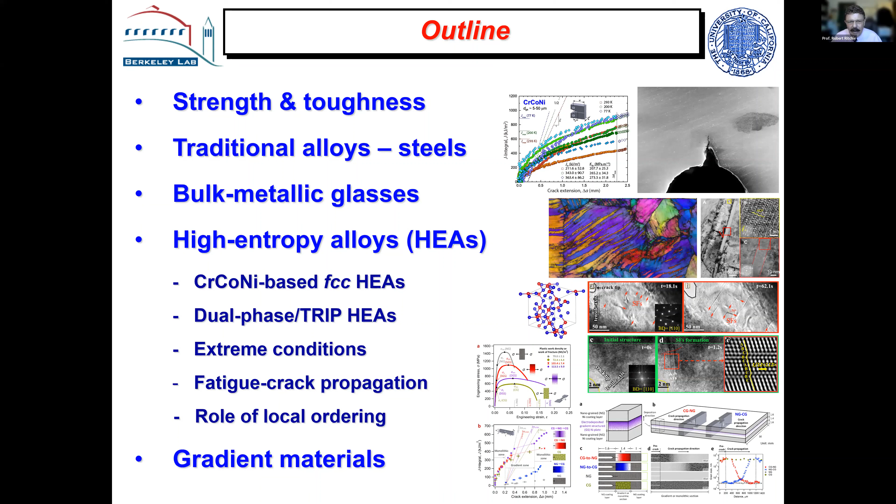And at the end, if there's time, I'll talk a little bit about gradient materials, which is nature's way of doing it. So let's start with my notions of strength and toughness. I call these conflicts because in many cases, high strength materials have low toughness and vice versa.

But I think you can look at toughness—it's obviously perceived to be the energy preventing a crack from causing fracture. But I look at it as a competition, and it's a competition between two classes of toughening mechanisms.

The classic ones, which are primarily used in ductile materials, I call intrinsic toughening mechanisms. They take place ahead of a crack tip, and they are basically mechanisms that inhibit damage. The primary driver for this is plasticity.

And that's why there's a conflict between strength and toughness, because high strength materials have less plasticity, and therefore there's less plasticity to engage in this intrinsic toughening. These mechanisms occur ahead of the crack tip, and they primarily originate at the nanoscale, the scale of a Burgers vector or something like that.

If you look at a brittle material, though, those mechanisms don't work, because a brittle material in the limit is defined as one where you break a bond at the crack tip rather than emit a dislocation. And there you have to operate what I call extrinsic mechanisms.

These operate primarily behind the crack tip or at the crack tip. They are associated not necessarily with plasticity, although plasticity could play a role—they're associated with shielding. They are mechanisms that basically shield the crack tip from the applied stresses, and they carry load that would otherwise be used to propagate the crack.

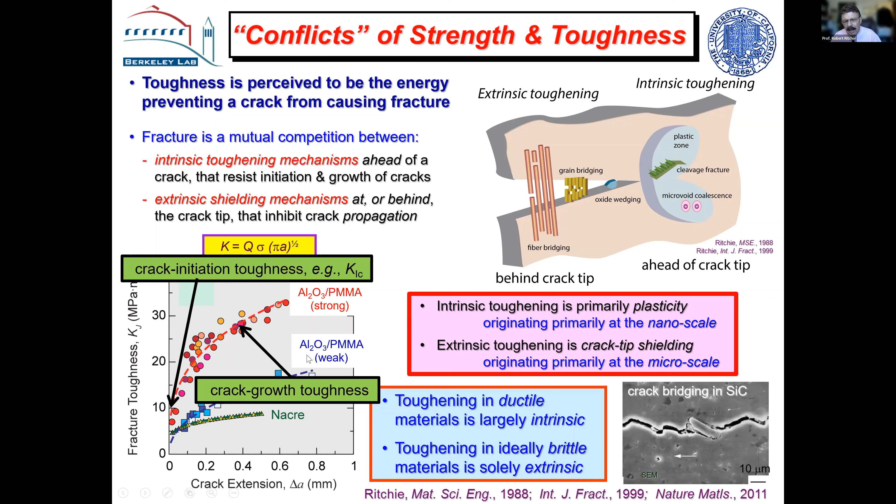Okay, so let's start with something a little bit old. I want to talk about steels, basically traditional alloys initially. And just to remind, before I get into this, there was a phenomenon that we looked at 20, 25 years ago, which we call delamination toughening, which has relevance to these steels now.

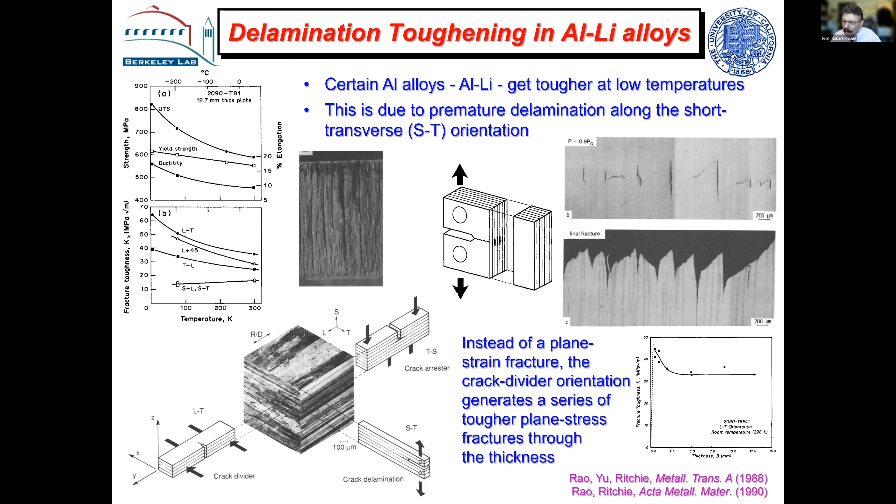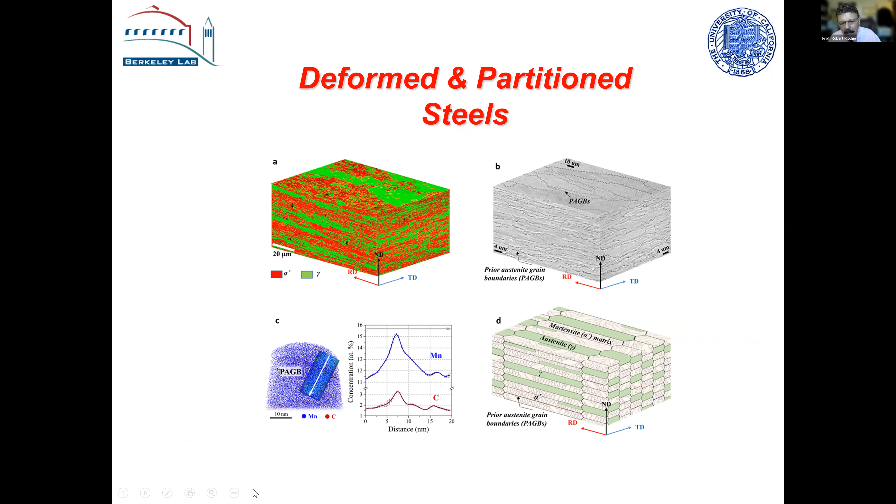Well, when we look at these new materials, for steels, a similar thing happened. These are called deformed and partitioned steels, developed by Mingxi Huang at the University of Hong Kong. His philosophy was to make a very cheap steel with great properties. And this is cheap—it's got just manganese in it, a little bit of carbon, a little bit of vanadium, a little bit of aluminum, but mainly a 10 manganese steel, very cheap.

He takes it through a very complicated series of heat treatments involving hot rolling, warm rolling, and annealing. That's the difficulty, I think—there's quite a lot of things to do. But you end up with, again, a pancake type structure with these layers, consisting of both martensite and austenite. And the austenite can transform to martensite, so it's a bit of a TRIP steel.

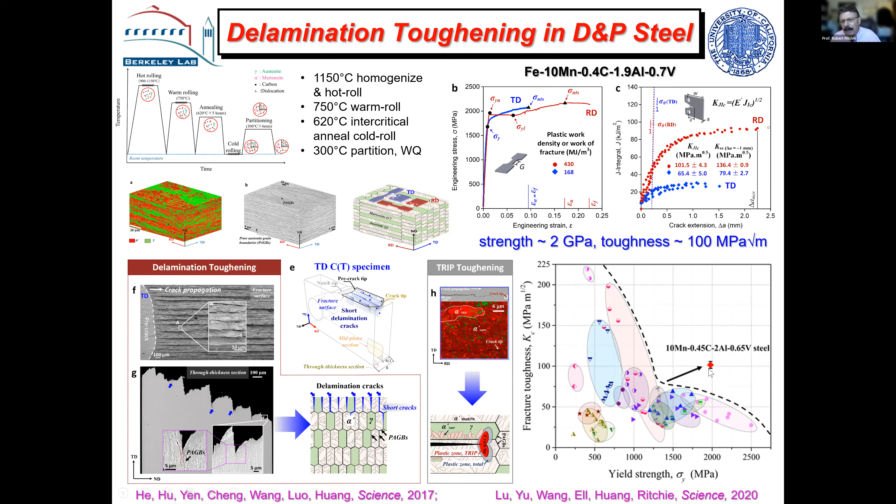So I thought I'd throw that in because it's a kind of a different kind of mode. The other one, you can see here, this is a banana plot of toughness versus yield strength, and this pretty high toughness you can generate with these relatively cheap steels.

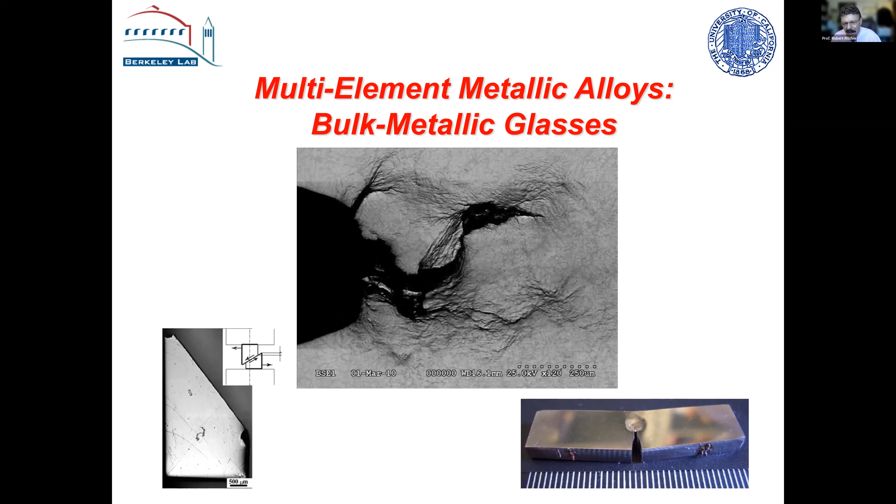Another interesting one, before I talk about high entropy alloys, is metallic glasses. Now, I don't do a lot of work on metallic glasses, but I'm firmly convinced that the majority of toughness data on metallic glasses, which is published in the literature, is actually wrong, but that's by the by. But anyway, you can get very tough materials with these.

Now, as you know, metallic glasses have this issue of forming shear bands, and a single shear band can basically reduce the ductility to near zero, and you get very, very low toughnesses and low ductility. But if you can generate multiple shear bands, the shear bands are in fact the form of plasticity. So if you get multiple shear bands and you can somehow arrest them before they cause complete failure, you can get good properties.

And so this was first done by Bill Johnson and his student Doug Hofmann. This was a while back, but he put a second phase in so that he could basically stop these shear bands from getting long enough so they could cause failure. You want the shear bands because they generate plasticity, but you don't want them to get too long to cause failure. And the result was very high toughness.

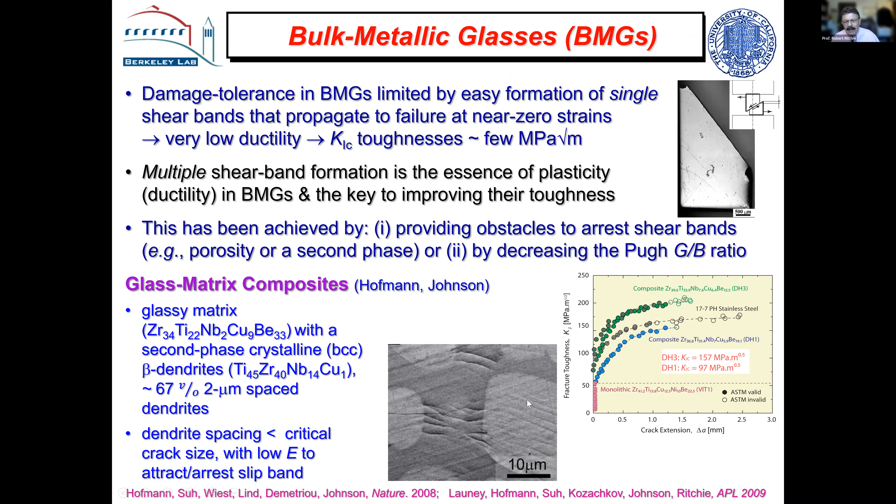So we wondered whether we could do this with a monolithic glass. And this was, again, a while back, but we generated a palladium silver containing glass, which had remarkable toughness. You can see an image of it now. It looks like mild steel. This is a material with a 2.5 gigapascal strength, but it clearly has toughness.

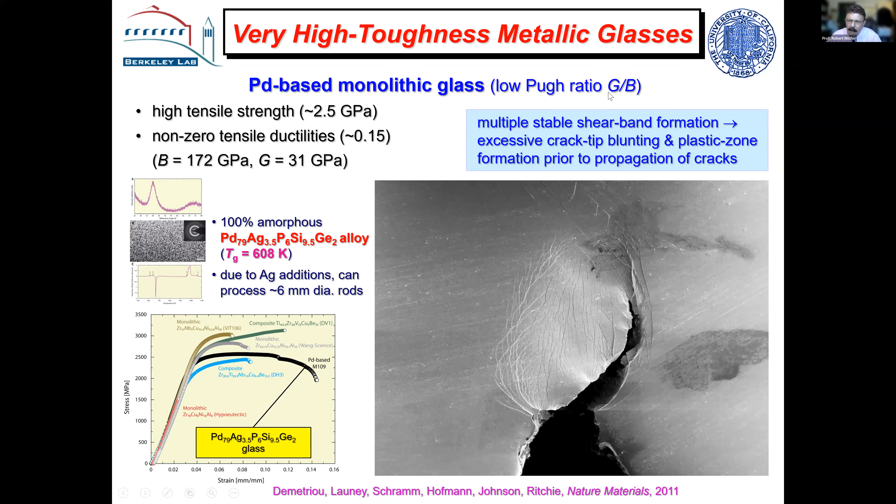And our philosophy of doing this was very simple. We said, well, if we have a low, I think this is called a Pugh ratio, a low shear to bulk modulus, the low shear modulus would promote multiple shear bands, but the high bulk modulus would prevent them opening to form cracks. And this worked.

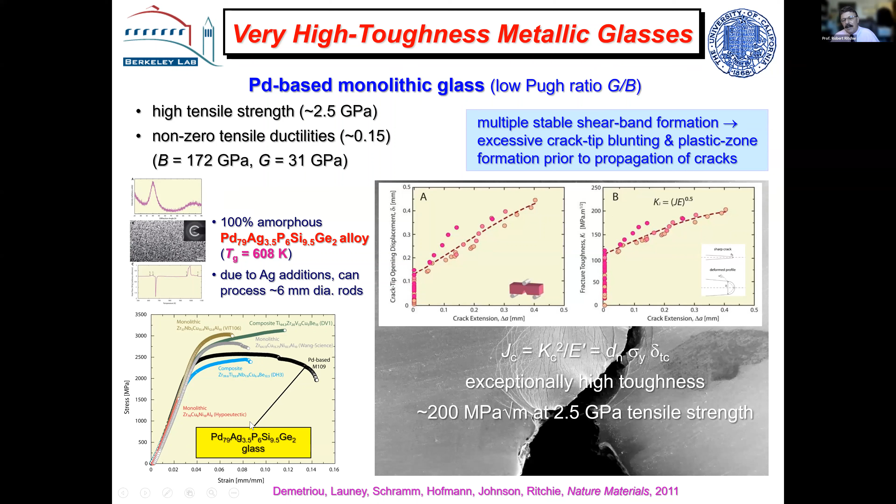We got extremely high toughnesses. This is a fracture toughness R curve here. We're now close to 200 at the crack growth toughness with a 2.5 gigapascal strength material. Exceptionally good toughness. And if you look at this on an Ashby plot, this is fracture toughness versus yield strength, we're way out here, pretty high toughness material.

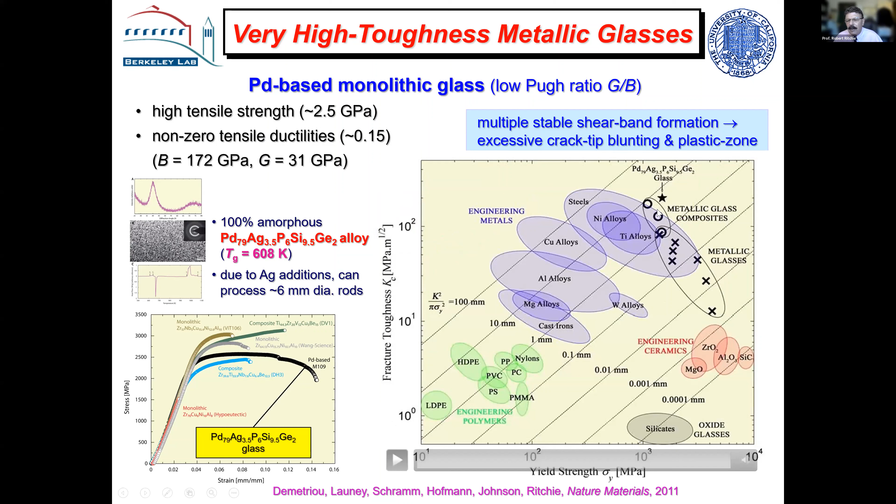So we thought we were wonderful. And then we started to look at different size samples. So we had this toughness of 200 here in a fairly small sample.

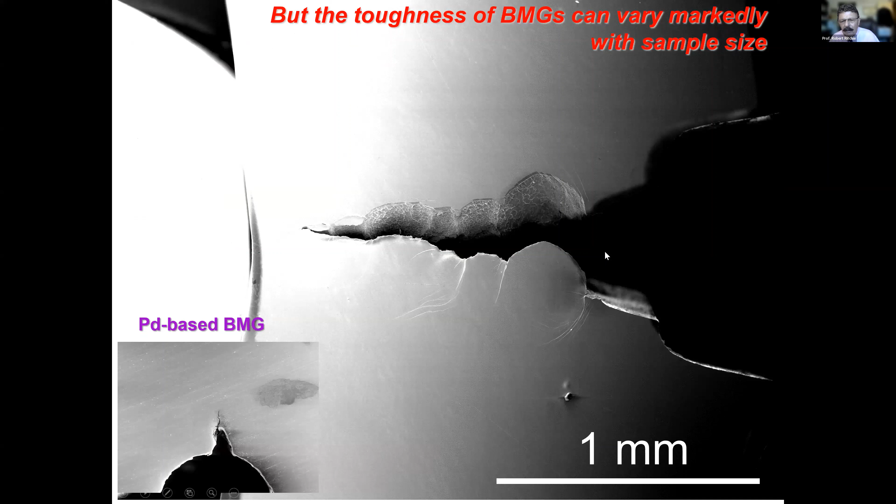We got the material from Germany and we looked at a bigger sample. And instead of getting a toughness of 200 megapascal root meters, we got a toughness of close to 20 megapascal root meters in the same material, but a different sample size. This is a much bigger sample size than this one. So what's going on here?

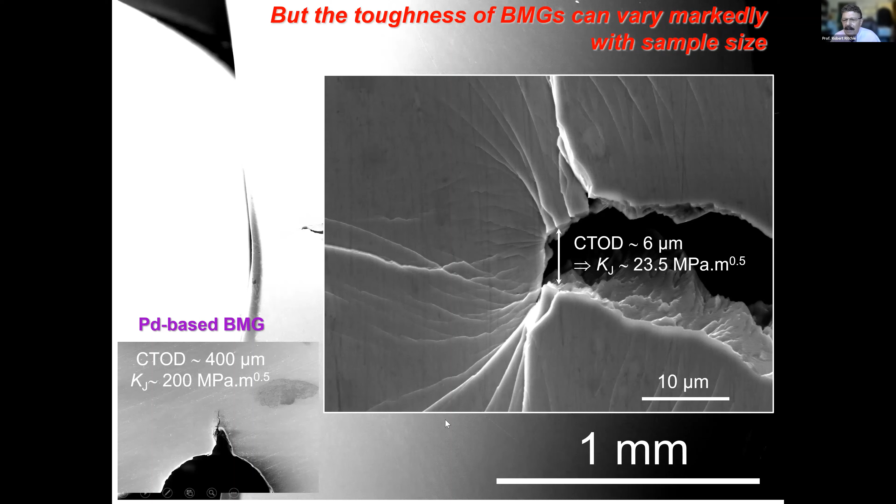I think we don't know precisely, but we believe the reason is that when you're using linear elastic fracture mechanics, everything's fine. But when you go into the non-linear elastic fracture mechanics regime, you have to have a Hutchinson-Rice-Rosengren field that's unique at the crack tip. That field is dominated by strain hardening. It's that local degree of strain hardening that gives you the uniqueness that lets you measure the toughness in that non-linear elastic regime. If you go to full plasticity in any material, the fields just are not unique anymore.

The bend fields and tension fields are totally different. But you can get away with it in the non-linear elastic fracture mechanics because of that zone of hardening. Of course, these metallic glasses don't have any hardening - they soften, the shear bands are softening. So we think one of the problems is that the extent of the HRR field in a metallic glass is extremely small, so the region over which J can be a unique parameter would be highly limited.

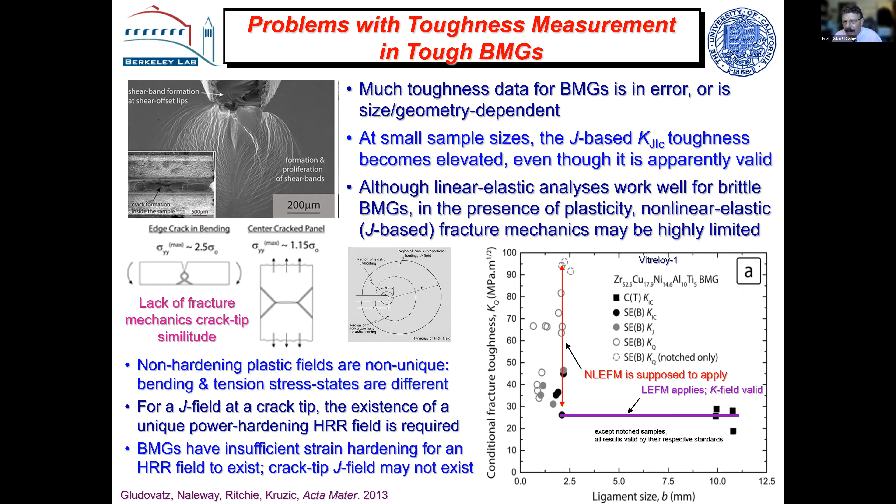There's another reason, though, which I think is very interesting, and that is what causes these shear bands. In metallic glasses, if you anneal them, they become more brittle, and if you quench them, they become more ductile. There's this phenomenon called rejuvenation, which seems at first sight counterintuitive. But what we have here - this is a theory that came out of Evan Ma's work - is that in these amorphous states, you get little motifs of atoms, little regions of icosahedral symmetry, five-fold symmetry, which make them stable.

These are basically motifs, and you can predict them and you can actually measure them - it's kind of difficult to measure them. But some of these little motifs of atoms are not quite as stable. They don't have as much five-fold symmetry, and he gave them the name geometrically unfavored motifs, or GUMs. They're more loosely packed, and because they're unstable, they can trigger shear bands. So the irony is, if you can get lots of gums in the structure, you can trigger lots of shear bands, and that leads to plasticity in these materials.

These are basically MD simulations, in this particular composition they're all zirconium copper. You can have a situation where you don't have many gums, so you just get shear bands in one place, and you get a degradation of the properties quite considerably - it just necks down to nothing. But if you can distribute the gums throughout the structure, you get multiple shear bands, and that leads to a degree of plasticity, because the gums are what lead to the shear bands, which lead to the plasticity.

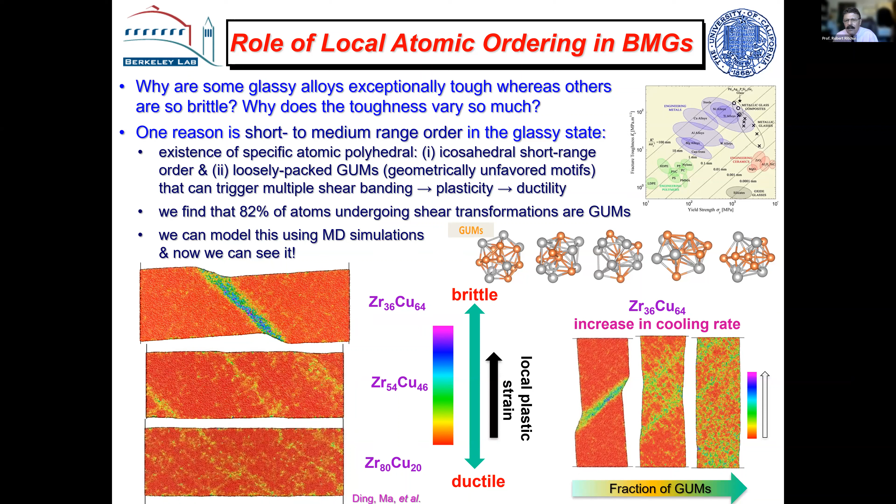And you can change them with cooling rate. The irony is that when you have a slow cooling rate, you get a brittle material, and when you get a fast cooling rate, you get a ductile material - everything's back to front. So we tried to see if we could prove this using electron microscopy, trying to look at some way of examining that.

So we could try to find where the shear bands form, in regions where there's less icosahedral five-fold symmetry. This is work with Andy Minor at the National Center for Electron Microscopy. He has this 4D STEM technique where we can look at little tiny regions of atoms, of the order of about half a nanometer, and we can look at columns of atoms and see the structure. The key is we can move very quickly throughout a whole lattice because we have very fast detectors that can see these things.

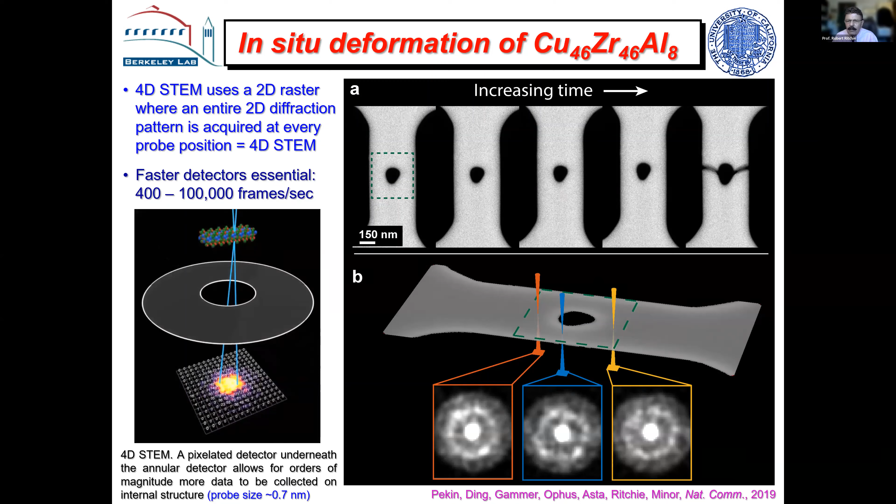So we had a little sample with a hole in it, and we pulled it in the microscope, and we tried to see the regions where there was less icosahedral symmetry, where there were more gums, and whether they were the regions where the shear bands formed. You can see the predictions first - this is the predictions of where the shear bands are forming, and of course they're forming where you'd expect. We're loading it in the vertical direction here.

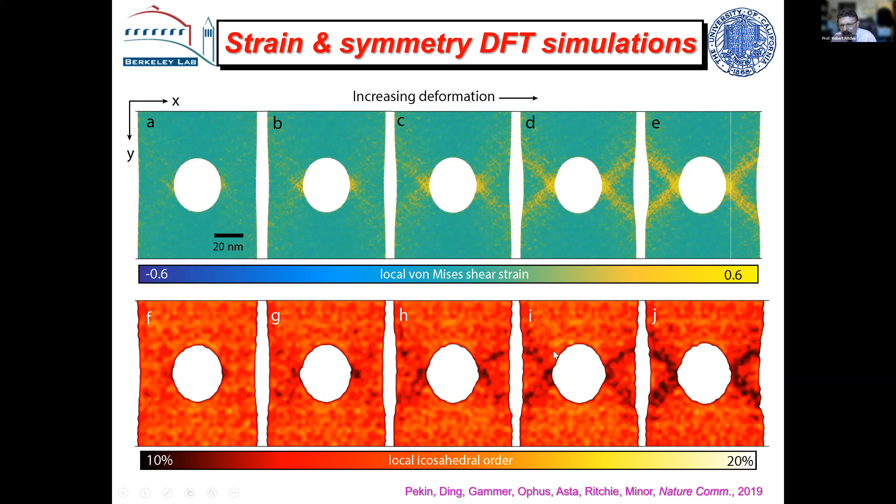But if we look at the regions of local icosahedral ordering - that means where the gums are the greatest - they form in the same bands. So it does seem to be a tie-up between shear banding and these gums. Now, this is a prediction; we tried to look at it in the microscope. This is not as clear, but I think you can convince yourself that you can see the regions of strain again at 45 degrees, or nominally 45 degrees.

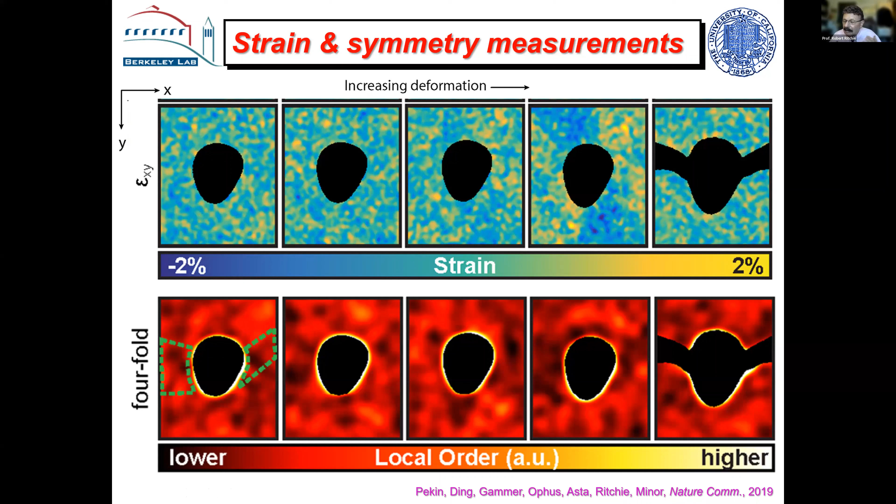We think we can make out that in this region here, the lower degrees of order, is where these bands should form. It's a bit of a chicken and egg argument, because when you form a shear band, you break the icosahedral order, but there's clearly a link there. We think this notion of geometrically unstable motifs of atoms and the formation of shear bands may be key to these very high toughness metallic glasses, because they can generate multiple shear bands and ductility.

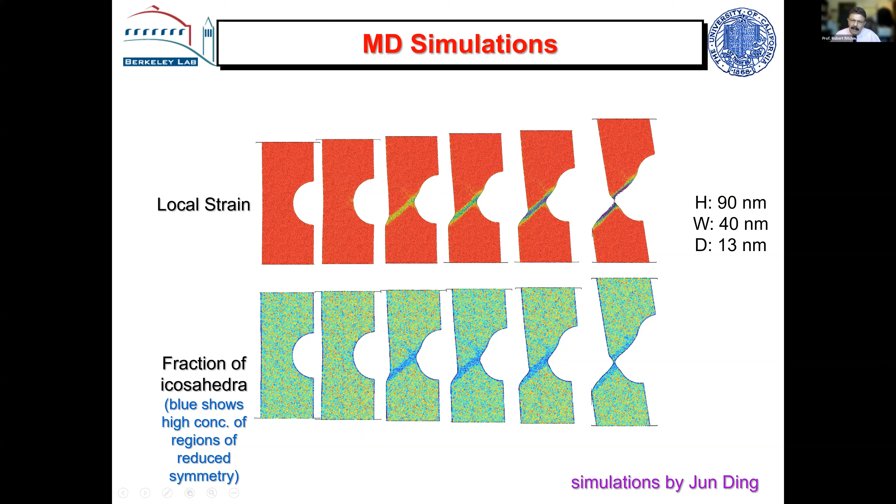You can see another simulation here of where the local strains are forming, and this is where the fractions of these gums are formed. The maximum fractions are formed in the same place. Anyway, those are two examples of a little bit more unusual damage tolerant mechanisms.

Now let me talk about high entropy alloys for the rest of the time. That's what I really want to discuss. You've all probably heard of these. We're talking about multiple principal element metallic alloys.

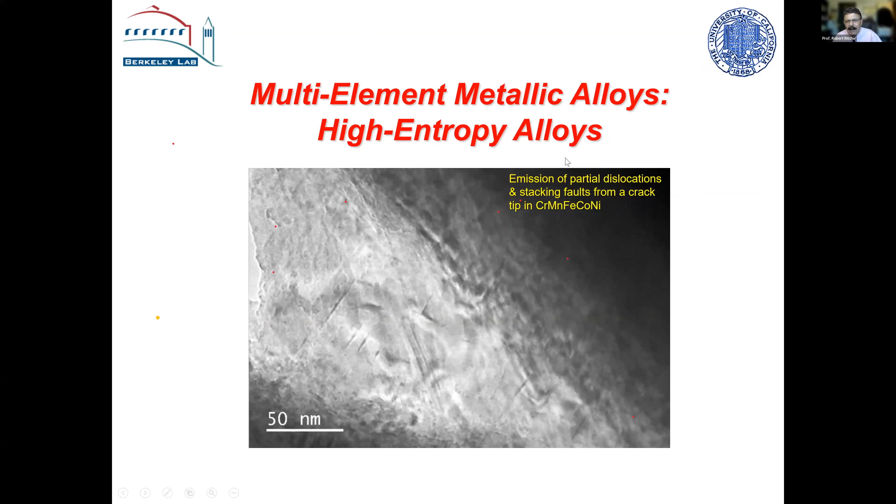There are two types, and I'm going to talk about both. Initially I'll talk about the so-called FCC, face-centered cubic ones. These have been around for about 20 years, discovered around 2004 by Yeh in Taiwan and by Brian Cantor in Oxford. They both reasoned that if you have multiple elements, you could maybe find exciting alloys in the center rather than the edges of phase diagrams, or you could come up with this notion of configurational entropy overwhelming the enthalpy of phase formation to give you a single phase material.

The field has gone beyond that now, looking into multiple principal element alloys. We don't worry so much about the entropy idea, although it does have some justification, but it's a much broader field. The original alloys still look very interesting.

This was one of the ones known as the Cantor alloy. It's chromium, manganese, iron, cobalt, nickel, equiatomic, face-centered cubic, although each of these elements has different crystal structures. When you look at these alloys, I'm sure you've seen this story before since it's quite old now, but we look at the engineering stress-strain curve.

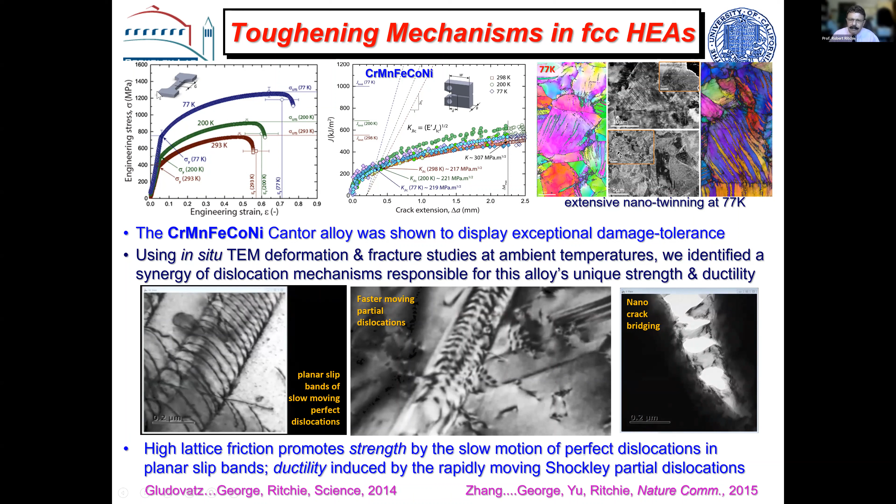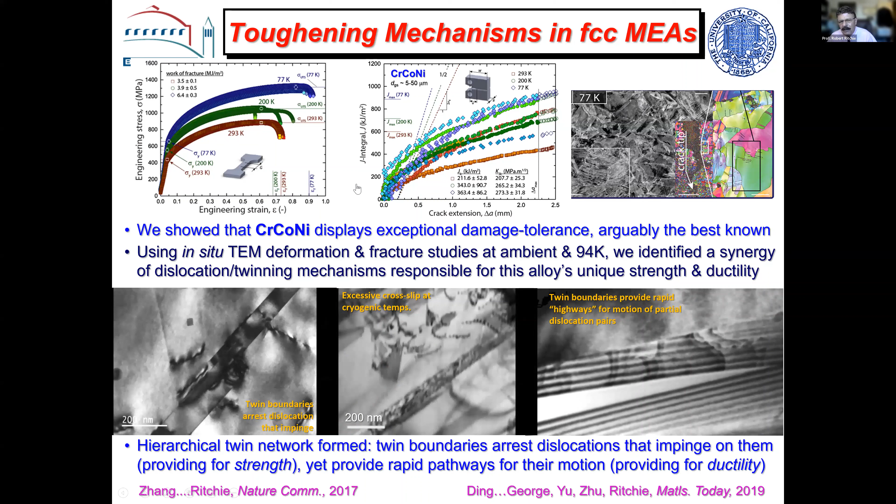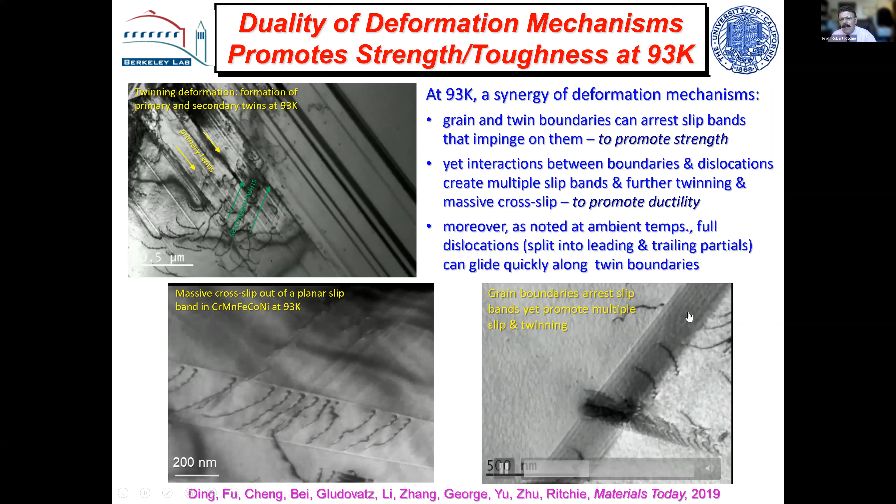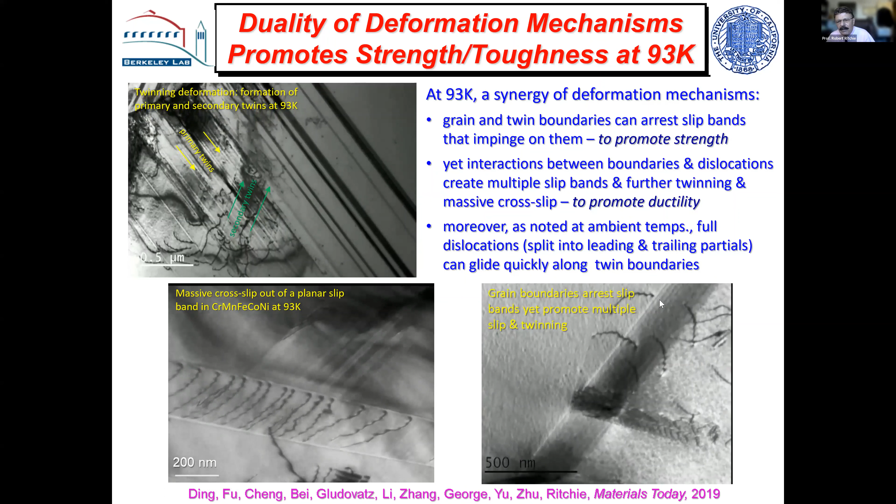And the last one I think is very interesting is the motion of these dislocations along the twin boundaries themselves. This is a twin, and you can see these partial dislocations moving down these highways. So again, this is one of the mechanisms by which you can promote deformation.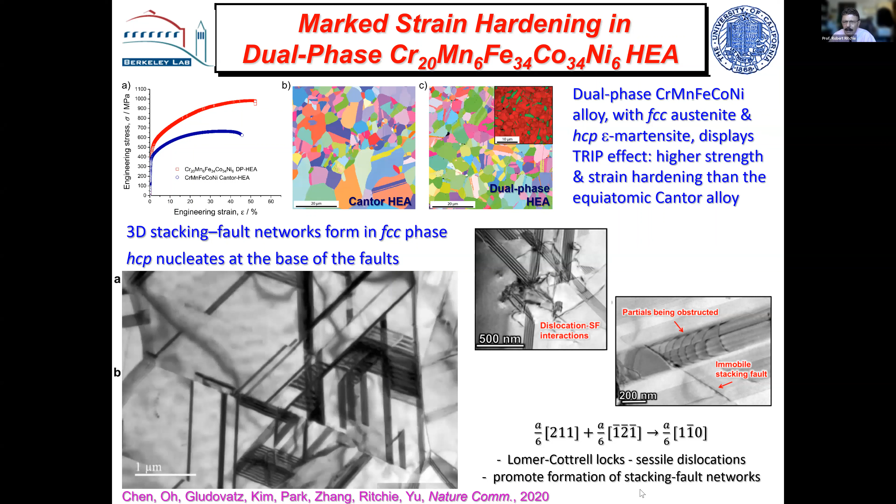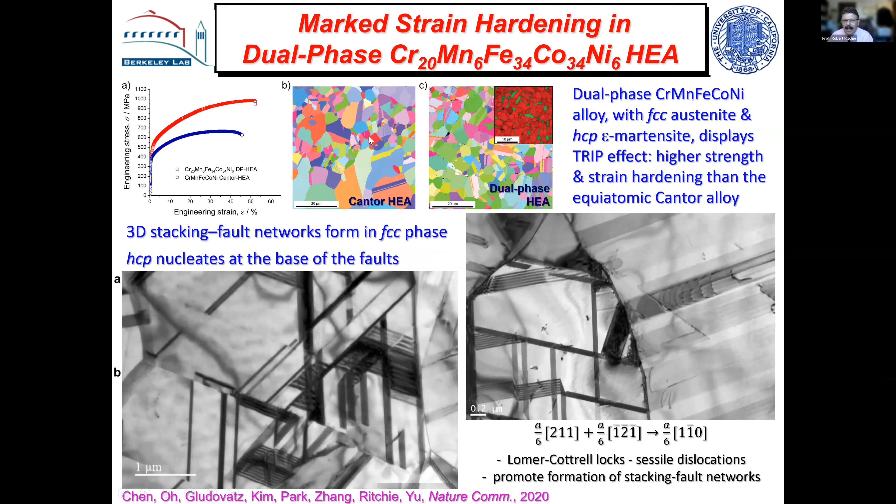And they really are stable. You can see dislocation slip bands coming up to these networks, and it basically stops them dead. So it's a very, very powerful strain hardening mechanism. So this alloy should be better, right? Should be even better, but it isn't. This is the original Cantor alloy. These are R curves, J integral versus crack extension.

Red is warm at room temperature, green is dry ice, and blue is liquid nitrogen. And that's the one I showed you before, that you get this increase in toughness at liquid nitrogen temperatures. But when you have this trip effect to form the hexagonal, be it dual phase, or you can do it where it trips itself during the test, you get good toughness, but it doesn't get tougher at these lower temperatures. So it's a very similar composition.

These two have the added mechanism of transformation to form a hexagonal phase, but it's not as good as the original alloy, which didn't have so much of that. The reason is that the trip effect is beneficial—it absorbs energy and gives strain hardening, but the resulting phase is epsilon martensite, which is brittle. So you don't want too much of it, because that gives you an embrittled material.

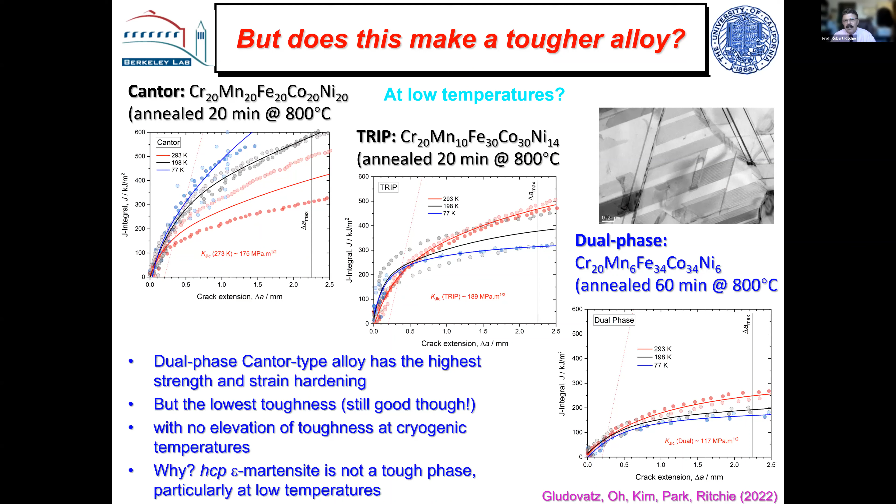So what happens if we go to extreme conditions? I'll quickly go through these. This is looking at the same Cantor alloy at very high strain rates. We started with uniaxial compression at 10 to the minus 3 per second, then went up to dynamic compression about 6 orders of magnitude, and then did the Hopkinson bar technique at about 7 orders of magnitude in strain rate.

What we find here is we get very high strength. We can get the strengths up as high as 4 gigapascals with this split Hopkinson bar. But we start to see all those mechanisms I talked about, in much greater magnitude.

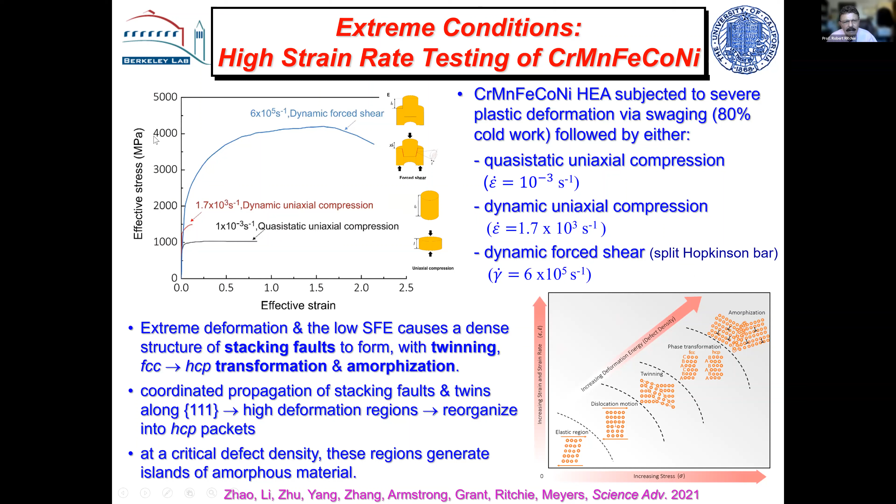We see a lot of twins, very fine twins forming, much finer than at room temperature. You can see them here as well. We also see regions of the hexagonal phase, but very little and in very narrow bands. And we see amorphous material—we actually form amorphous material at these very high strain rates.

So we're getting ductilities of 50% at these very high strain rates, but we're getting ultimate strengths approaching, well, over 4 gigapascals.

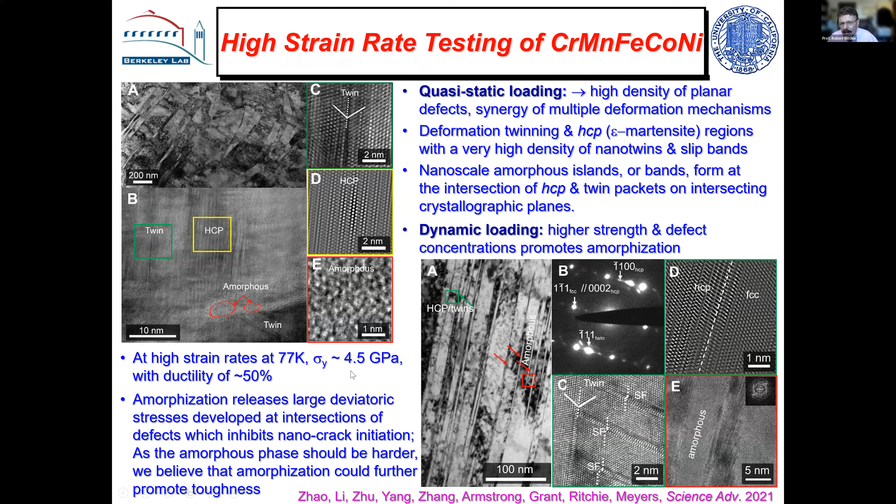If we look at the toughness of these alloys, you don't measure a conventional toughness, it's absorbed strain energy basically. These very highly strained alloys have the highest toughness compared to a whole bunch of other materials you might test—a bunch of steels, maraging steels, titanium, copper, and the like. Again, it's this multiple generation of deformation mechanisms, and even now amorphous material, which sustains the strain hardening, which is the key.

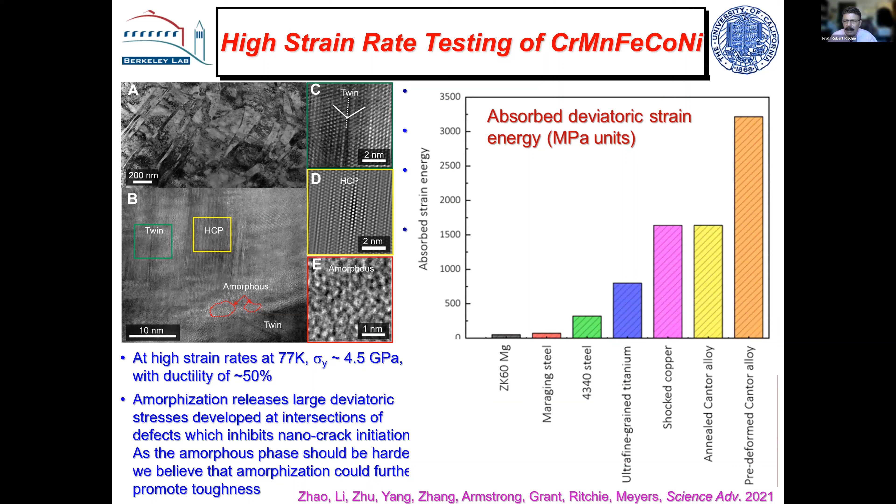Now, the most recent stuff we've done is liquid helium tests. We went to the ENGIN-X facility just outside Oxford and did the tests in liquid helium. We have to have big samples, so we're not getting 4 degrees Kelvin—we're closer to 20 degrees Kelvin, but it's pretty cold.

Here is that 3-component chrome cobalt nickel alloy on an R curve, J versus crack extension. There's the original data I showed you for room temperature, dry ice, and liquid nitrogen temperature, and this is the one at liquid helium temperatures. We are measuring toughnesses here of 415 megapascal root meters, and crack growth toughnesses, which I call the steady state toughness, of 500 megapascal root meters. To my knowledge, that is the highest toughness ever measured in a material.

So there's something magical about these materials. And remember, they are the simplest structure imaginable—just equiaxed grains, single phase. But we can get remarkable toughness.

It's all ductile fracture. And if you look at the mechanisms when you get down to liquid helium, everything is that much finer and that much more planar. You can see this in the EBSD, masses of twins everywhere. You don't even see dislocations because the stacking fault energy gets lower and the stacking faults extend dramatically.

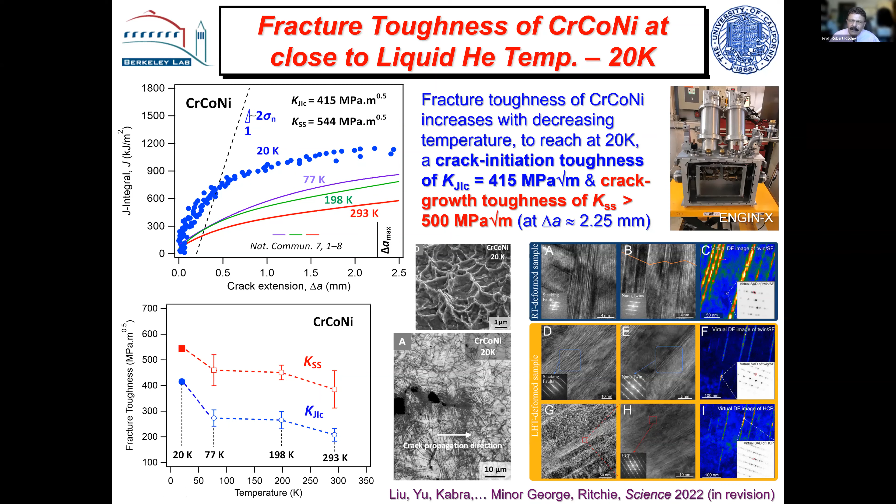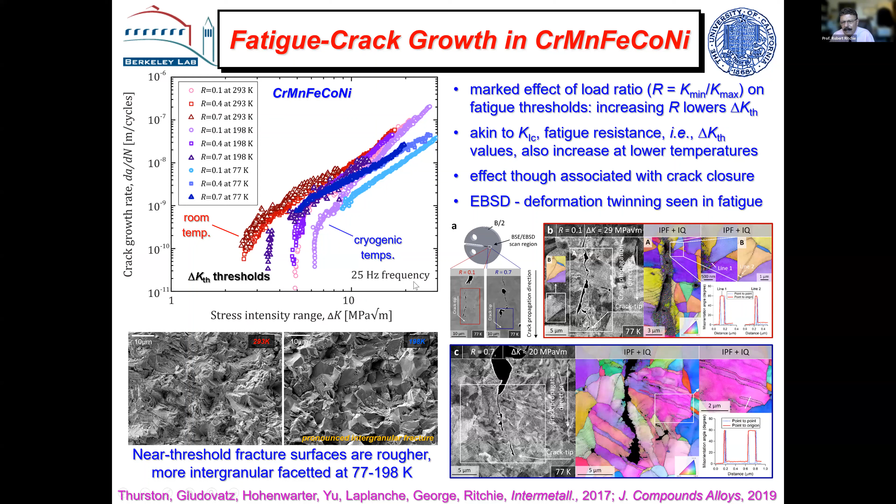There are fatigue effects as well—I'm going to bypass those because we don't have a lot of time. The thresholds in fatigue are higher at low temperatures, but we don't think that's necessarily associated with what I talked about. It's more associated with so-called crack closure. But we do see evidence of twinning, and the twinning can cause crack deflection and things like that. So there is a big effect of this. But if you make the grain size coarser, you roughen the fracture surface and you get much better properties.

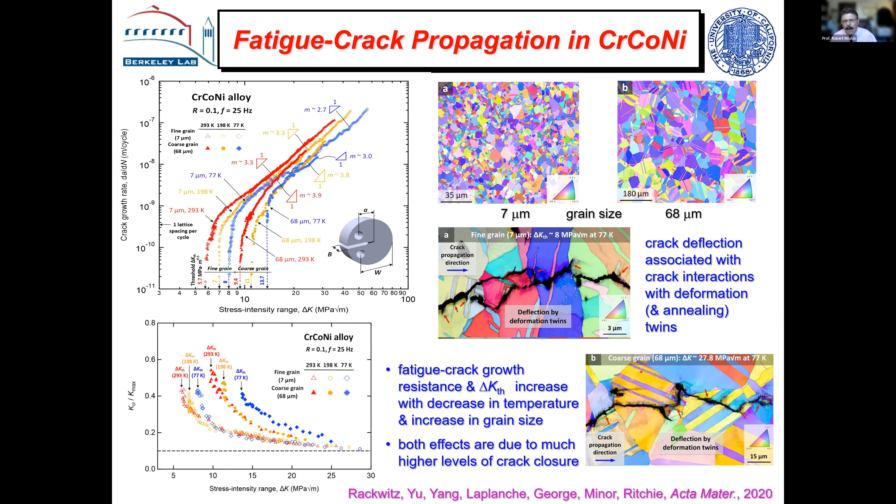But the last thing I want to talk about is a little different. These are multiple principal element alloys, and these FCC structures show, I think, the most exceptional damage tolerance we've seen in any material. People talk about high entropy, sluggish diffusion, severe lattice distortion, because you have different sized atoms in there, but they generally refer to the randomness of the solid solutions. A question we asked a couple of years ago is, are they random?

Are there any unconventional atomic structures or elemental distributions, such as clustering or local chemical ordering, that might affect or enhance these properties?

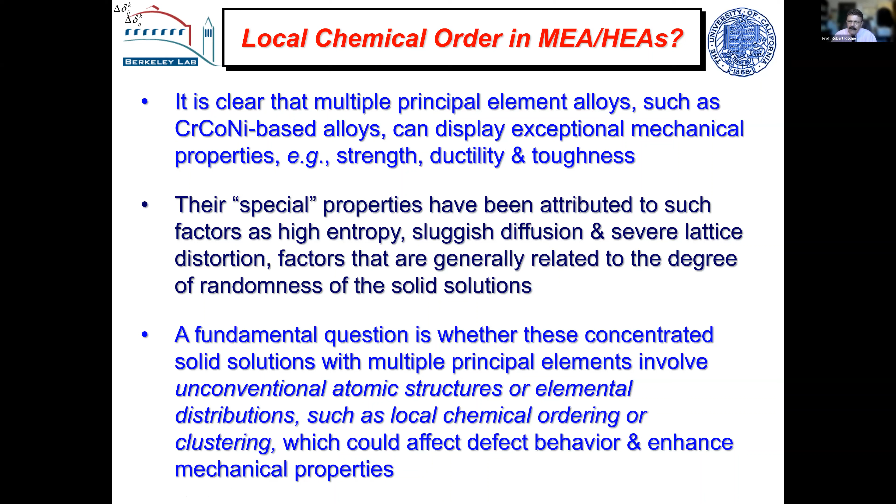So the first thing we did was work on DFT, density functional theory. There was some evidence from Oak Ridge on EXAFS, extended X-ray absorption fine structure, which suggested that in these multiple principal elements, certain bondings were preferential. For example, the chromium atoms tended to prefer to bond to unlike atoms rather than like atoms.

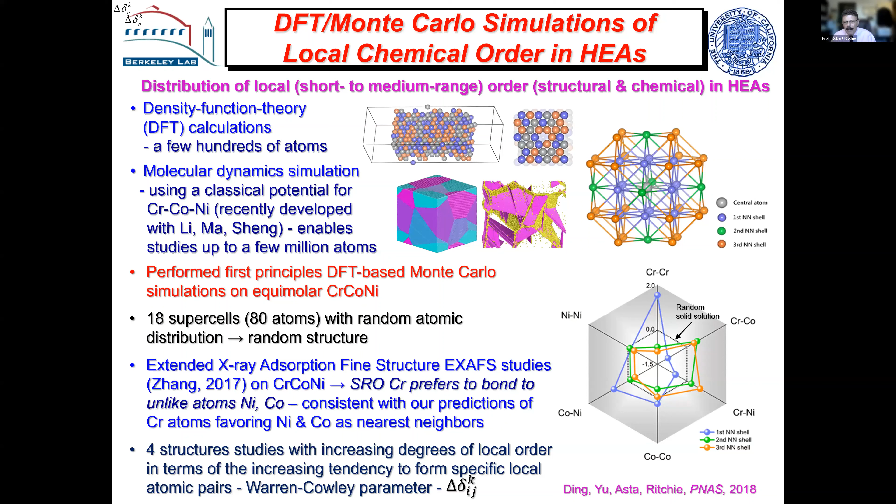This is known as the Warren-Cowley parameter, and chromium-chromium bonds are disfavored, but chromium-nickel and cobalt-nickel are favored in terms of preferred groupings of atoms. So we used Monte Carlo simulations based on DFT. Not too many atoms, unfortunately, because it takes too long. And what we found was that the presence of local order will naturally form as a lower energy state.

But what effect does it have? We found it had a dramatic effect on the stacking fault energy. This was done for the chrome-cobalt-nickel material. The computed stacking fault energy for the random solution is actually negative, which is always confusing because anybody who measured it would find it to be positive. If it was negative, you'd expect the whole structure to be hexagonal, and clearly it isn't. But we found as you increase the degree of ordering, the stacking fault energy went from minus 43 to 30 millijoules per meter, which is a big effect.

We also found that the stability of the face-centered cubic versus the hexagonal phase varied with increasing ordering. If you had a random solution, then the lowest energy structure was the hexagonal phase, consistent with this negative stacking fault energy. But as you increase the degree of order, it stabilizes the face-centered cubic phase. That's important because you don't want too much hexagonal phase.

We also found that it affected the twin boundary energy, and the formation energy for vacancies and interstitials. As I'll show you, we didn't do this, but Evan Ma subsequently did some MD calculations where it was found to affect the dislocation mobility, and it affects the slip mode. So this seems to be a pretty profound thing.

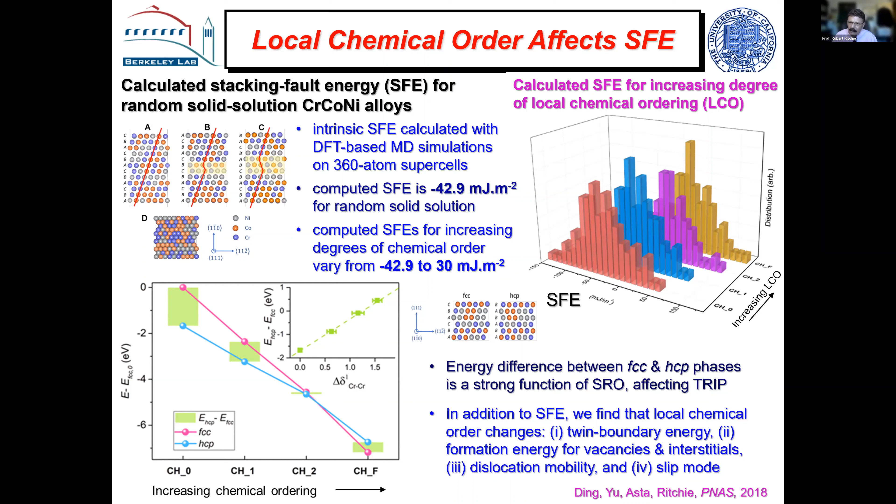One aside here: in this alloy, often the local ordering is associated with magnetism as well. If you put like-spin atoms together, particularly chromium-chromium pairs, you get what's called magnetic frustration. So there's a magnetic component to the local ordering in these alloys as well.

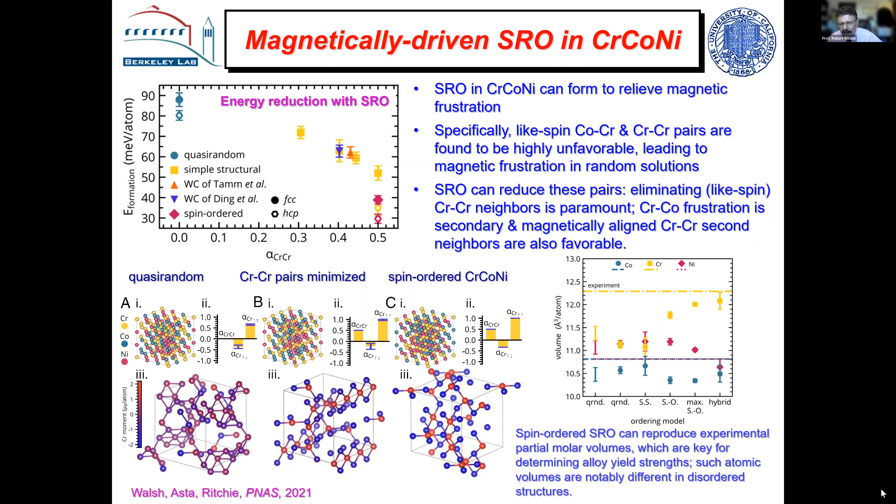But let's see if we can see it. This is what we did a lot of work on. The first work was done by Yu at Zhejiang University, who used atomic resolution EDS in the STEM, and looked at basically the Cantor alloy, but replaced the element manganese with palladium. The reason for this was to get a different atom with a different atomic radius and a different degree of electronegativity, to see if there's any change in order.

They do scans looking at columns of atoms, and can get basically the concentration of those columns. It should be random. In the case of chrome, manganese, iron, cobalt, nickel, there's basically randomness — you've got 5 elements, so it should be 20% of each element in each column if random, and that's what you see. But in the palladium one, we got tremendous variations, which in some cases went from the expected 20% to somewhere between 5 and 45%.

It's difficult to say that this is actually clustering. These are concentration modulations which have some degree of periodicity. The wavelength is about 1 to 3 nanometers, much higher than normal short range order, which is basically nearest neighbor shells, but it's clearly a form of ordering, and it generates a rougher lattice.

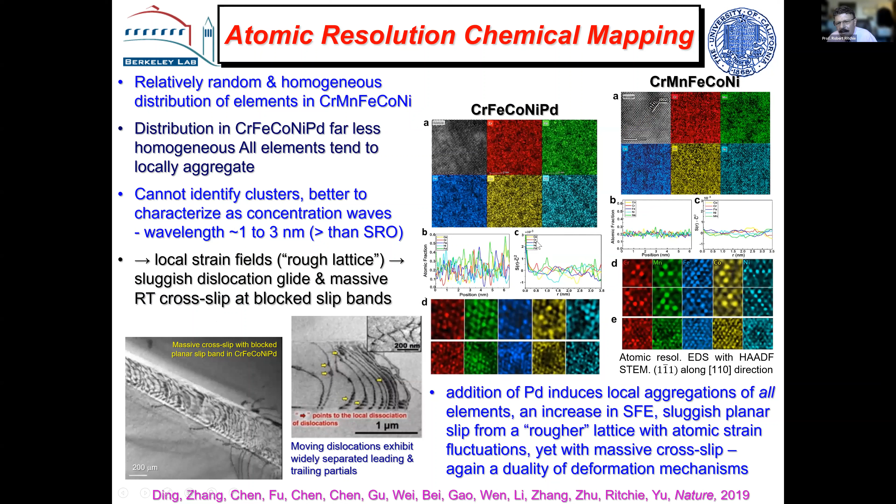But in the one with palladium in, where we do see these concentration modulations over these 1 to 3 nanometers, you can see quite a degree of positive and negative strains, which would act to roughen the lattice and possibly increase the strength of the material.

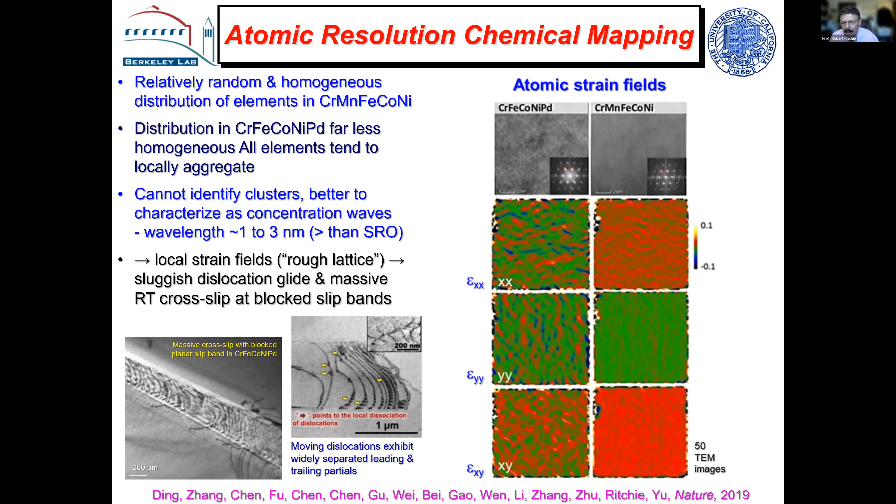A second approach was done to look at the more common form of local ordering, the nearest neighbors. This was done at Berkeley with Andy Minor again, looking at an energy filtered TEM, where you have an inline filter which gets rid of the inelastic scattered electrons. You get a cleaner image.

We looked at two conditions: one where we quenched it from a high temperature, presumed to have a random structure, and then we aged it at 1,000 degrees to generate short range order. That's easy to say, but there's a big tail behind it about whether there's order there or not. But what we see is a streaking of these spots, which is evidence of superlattice reflections.

You put the aperture on one of these streaks, take a dark field, and you can see these little clusters of atoms forming, in terms of the fast Fourier transforms here. If you map this out, we're seeing clusters of the order of about a nanometer, which are forming.

These are basically associated with what was originally seen by the EXAFS and came out of our DFT, nearest neighbor interactions, the preference for unlike rather than like bonds. I think that was the first direct evidence of local ordering in these materials.

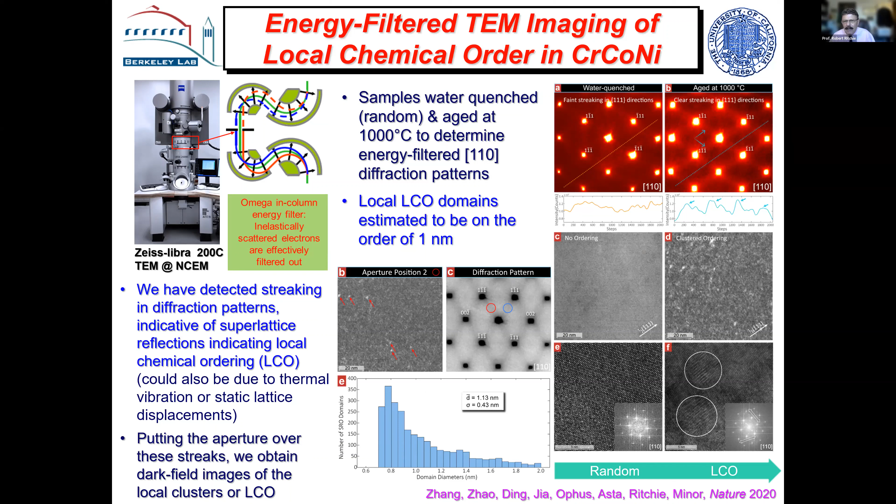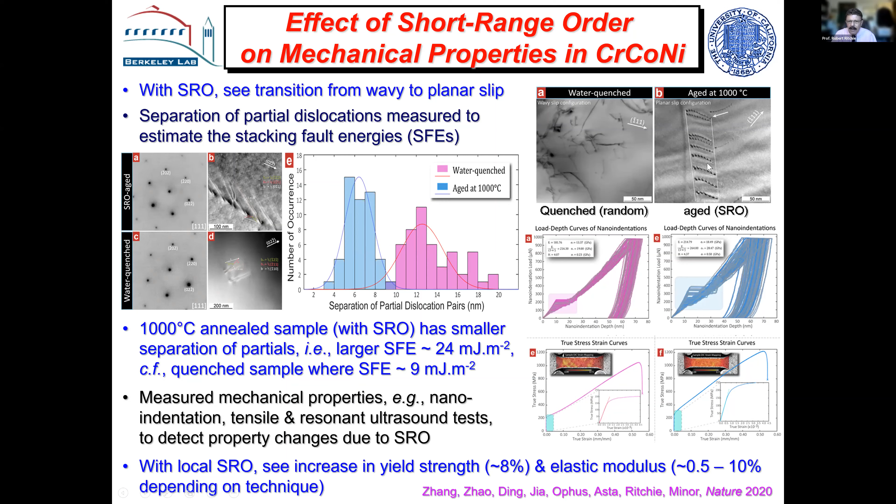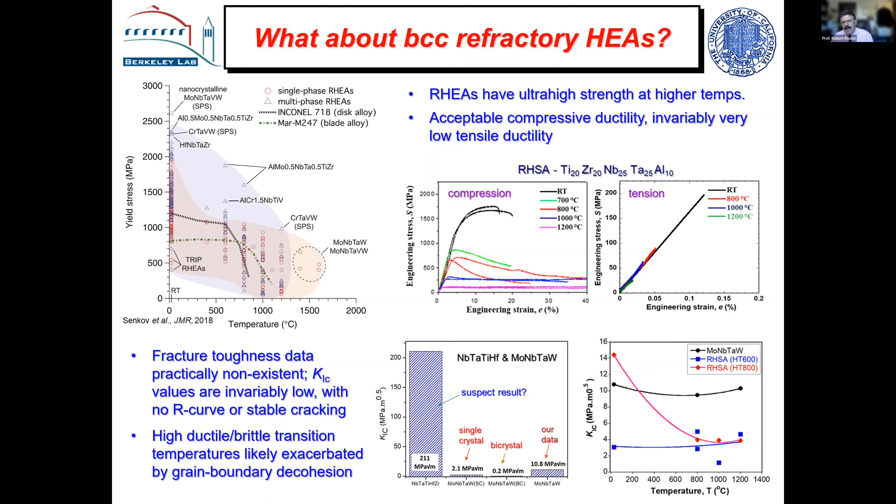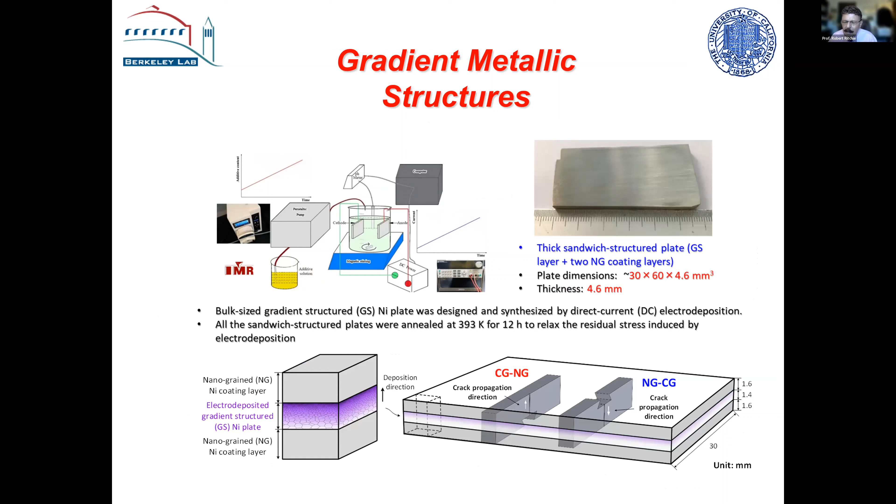So this is a very interesting field to look at. In the last few minutes, I'll just say the following: these alloys are expensive because they have multiple principal elements. Another approach, suggested by Ke Lu a few years ago, is to use nature's approach, which is to put in gradients. You know, bamboo is stiff, but it's flexible and hard.

That's generated by changing the spacing of the cells across the diameter of the bamboo—it's a gradient. Nature does this all the time. It's difficult for us to put gradients in, and it's kind of costly, but we've done this using a technique that Yi Li developed for us at IMR in Shenyang, using electroplating with nickel. We've generated gradients from a coarse grain, about 4 microns, to a fine grain, 30 nanometers, but in bulk sizes. People have done it in teeny sizes; we've done it now in centimeter dimensions.

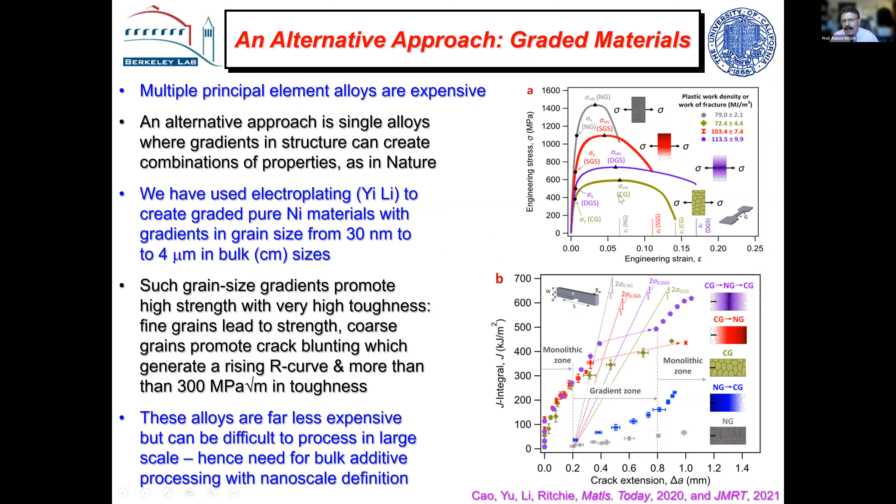What we find is we can combine strength and ductility seamlessly with these gradients. The fine grain structure has very high strength. The coarse grain structure has very good ductility. And if you make these gradients, you can combine the best of both worlds. Depending on which way the gradient is going, you can generate very high properties.

These are toughnesses in pure nickel with a variety of different gradients, from coarse to fine, fine to coarse. We're getting toughnesses of about 300 megapascal root meters in nickel, with strength levels in the gradient ones of well over a gigapascal. So this is an intriguing way to go—much cheaper in terms of elements, but you've got to make them, which means using additive techniques and so forth. It's beginning to become feasible, but it's a much simpler way to go.

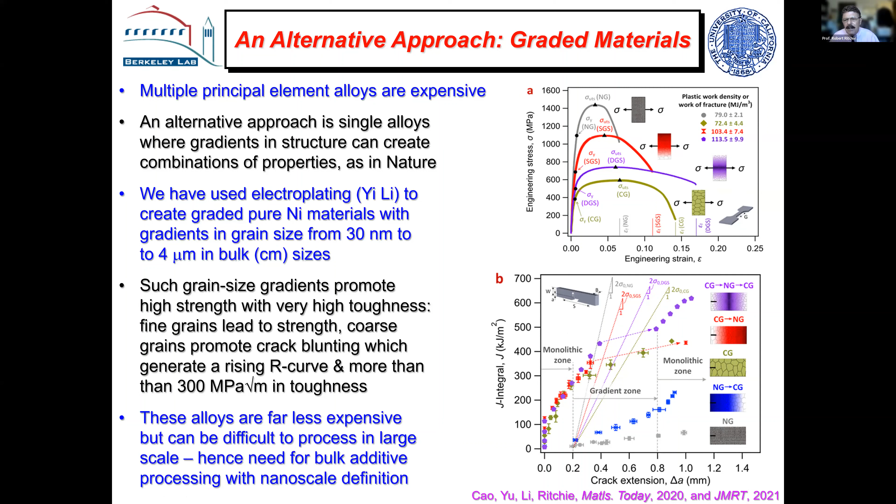If you look at how the cracks grow, the fine grain material gives you high strength. But instead of the strain hardening we've talked about before, in the coarse grain structures you get this massive crack blunting, which is very effective for toughness. So, a slightly different mechanism, but you can generate this combination of strength and ductility just with a simple nickel material.

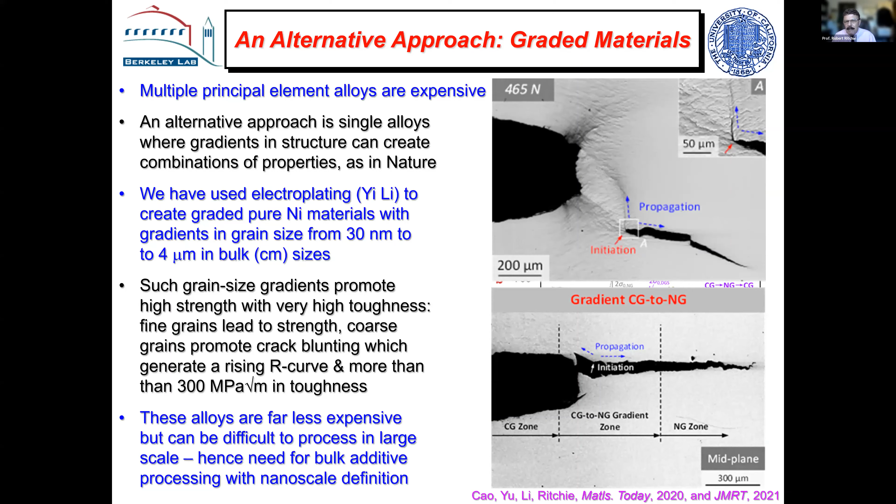Let me conclude. I've tried to look at some of the various ways to make high toughness, high strength materials—that's what damage tolerance is, making high toughness without degrading the ductility. I gave some examples from steels and bulk metallic glasses because they're very different. But in these high entropy alloys, the FCC materials tend to be, I think, the toughest materials we've seen.

And we think, although we don't have absolute proof yet, that the short range order, which may be ubiquitous in these alloys, or we may be able to control it, plays a critical role in triggering some of these effects, for example, destabilizing the hexagonal phase. So I think the notion of developing alloys by tailoring disorder by order is an intriguing thought, but whether it's feasible, we don't know yet.

And finally, I've just thrown out the fact that you can get pretty good properties, certainly strengths and toughnesses, which are not quite as high as these high entropy alloys, but still very good, just with simple alloys, if you can generate gradients. And gradients are a way of combining properties, and oftentimes unusual combinations of properties. But the problem with those is the ability to make them. But I think with some of the new techniques that are coming out in processing, this is going to be very feasible. Thank you very much for your attention.